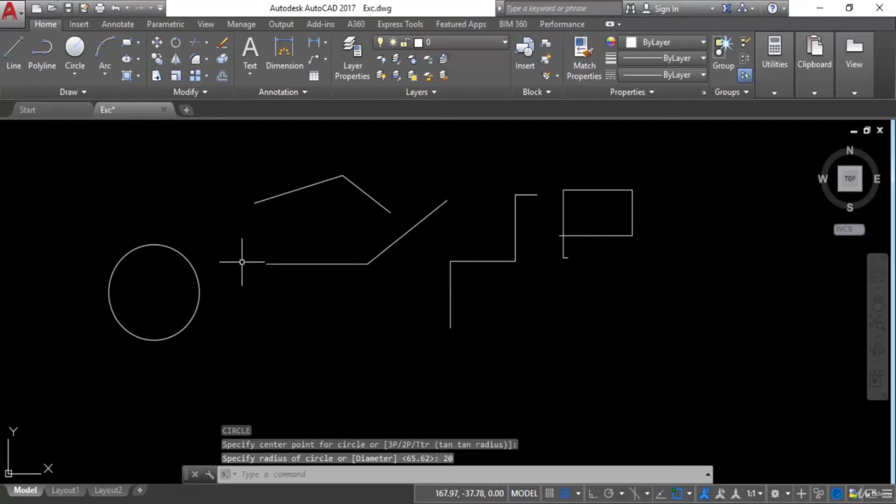Again, now I will draw a circle according to diameter. I will press C, then enter, then give the first point. Now I will give D here for diameter, then enter. Then it asks what is the diameter of the circle, so I want to give 40 units. I will enter 40 and press enter. Now this circle is 40 units of diameter.

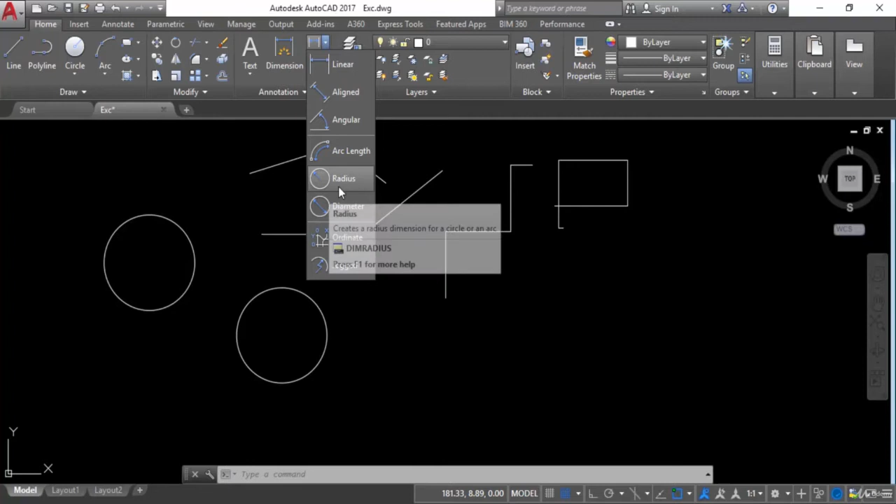And this is a 20 unit radius. So if you want to check radius and diameter, go into the Home tab and make sure you are in the annotation panel, and from here you can give the dimension. You can see some options: linear, aligned, angular, arc, radius, diameter. So if you want to check the radius, click here, or you can use the command DRA, for checking the radius of a circle.

So I will click here and click anywhere on the circle, and now it gives the radius of the circle. Or you can use the command D, R, A, then press enter. Now I will click here and you can see this is the radius.

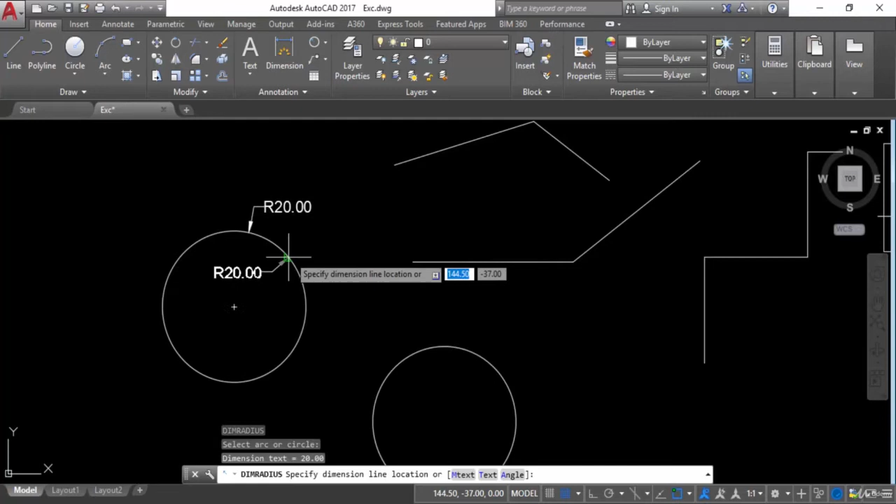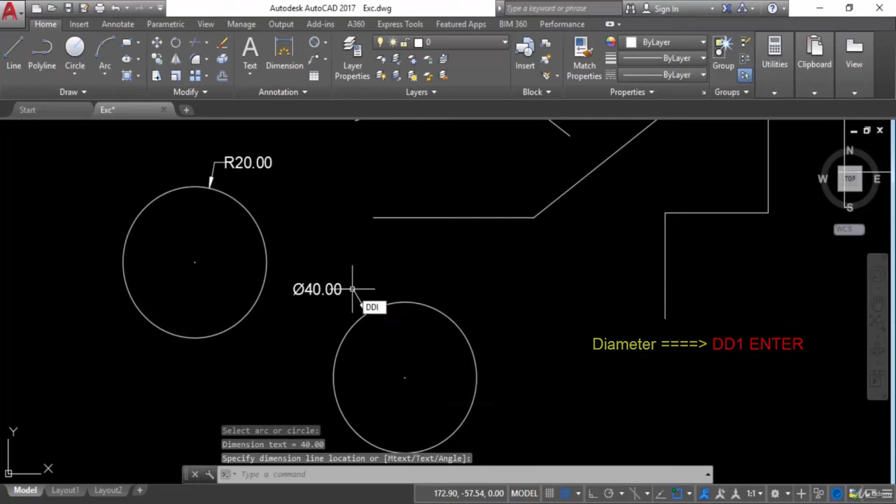Now if you want to check the diameter of the circle, go to the annotation tab, go into diameter, and click anywhere on the circle to check the diameter, or use the command DDI, meaning D and then I. I will press enter and check the diameter of this circle. As you can see, the diameter of the circle is 40 and the radius is 20. This means the diameter is double the radius, and the radius is half of the diameter. So I hope you understand how we can draw a circle according to diameter and radius.

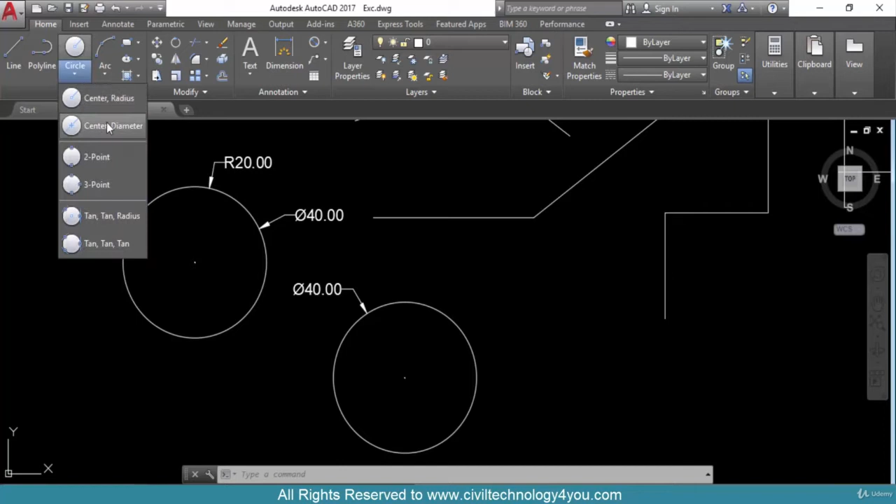Now we will use some more options. Click here and you can see some options like 2 point, 3 point, tangent radius, tangent tangent radius, and tangent tangent tangent. Radius is clear now, diameter is clear now, so we will use 2 point.

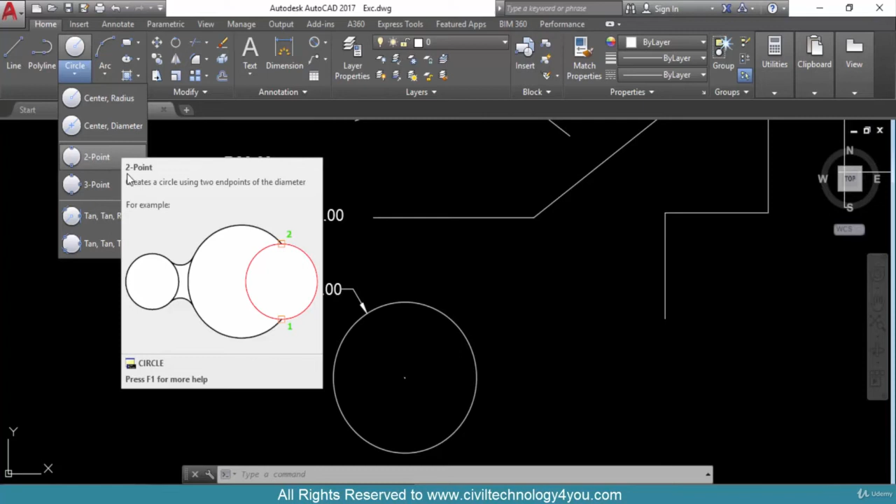For example, I want to draw according to 2 point. So I will draw a straight line here, and I want to draw according to this line. I will go here, press 2 point, then give the first point and then the second point.

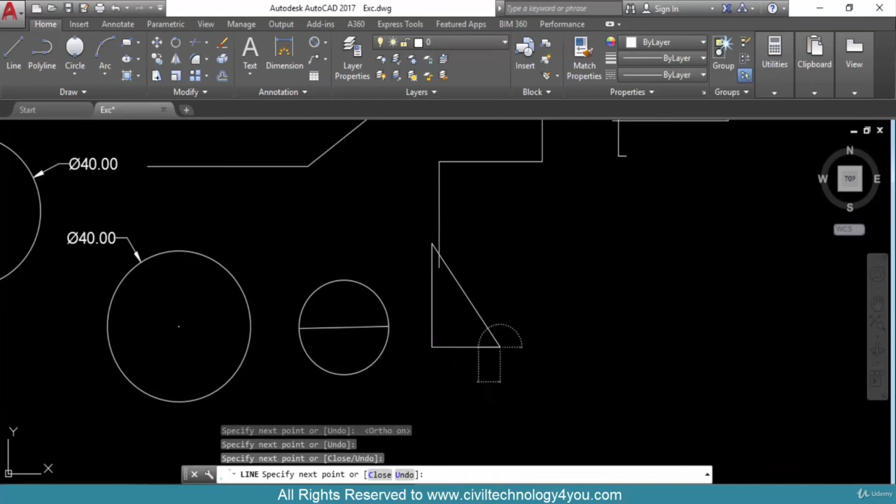Now we will see for 3 point. For example, I want to draw a triangle here. I'll turn on ortho mode, then this point and then this point. Now I want to draw a circle according to 3 points. I will go into the 3 point option, give the first point, second point, and then third point. Now it is according to 3 points.

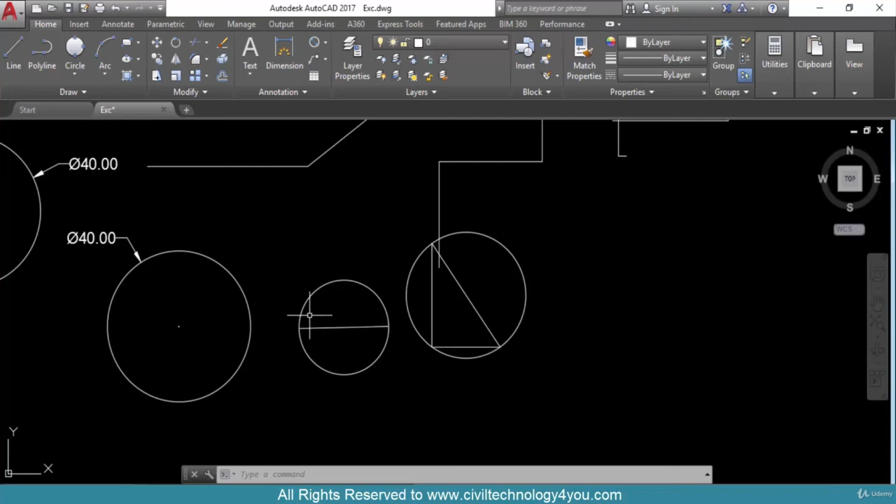Now there is one more option, tangent and radius. What is tangent? Tangent means a line or a plane that is just touching the object, not intersecting. For example, if I want to draw a circle that just touches this circle and this circle, that is called a tangent.

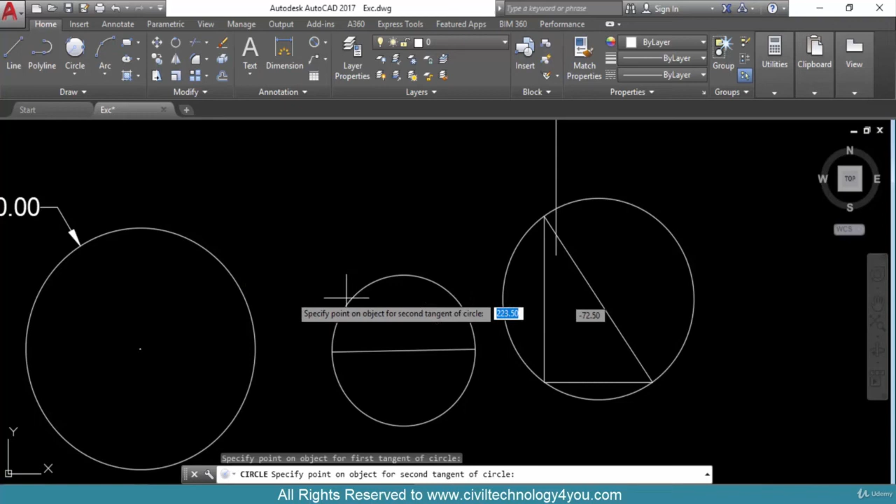So I will use this option as tangent and radius. I will go here and give the first tangent, then the second tangent, touching this circle and this circle, and then give the radius, for example 20 units. Now I will press here, and you can see the third circle is just touching this circle and this circle. That is what tangent is all about.

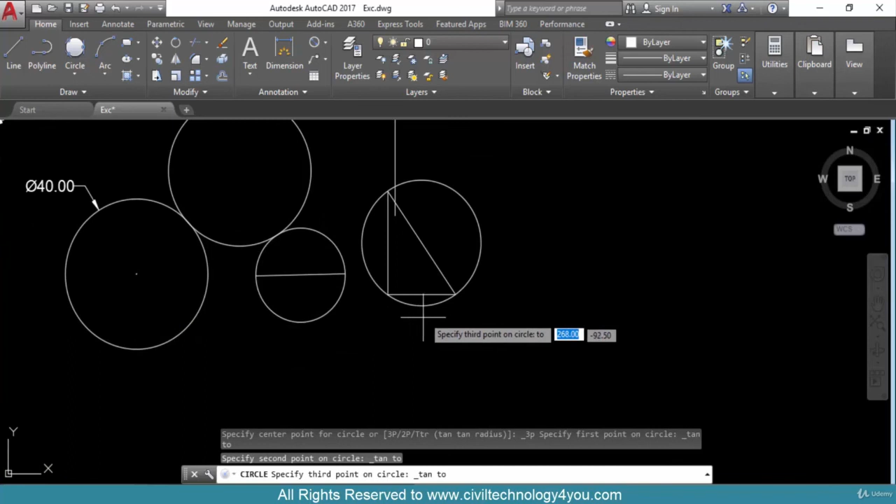Now one more option: tangent, tangent and tangent. This means it will touch three tangents. I will click here and give the first point, second point and third point. Now it is touching all three circles, that's what it means.

Now again, if I want to give tangent, I will go to tangent, give first, second and third. Now it is touching all three. So that's what tangent, tangent, tangent means, while tangent, tangent and radius means it will touch two objects and we also give the radius of the circle.

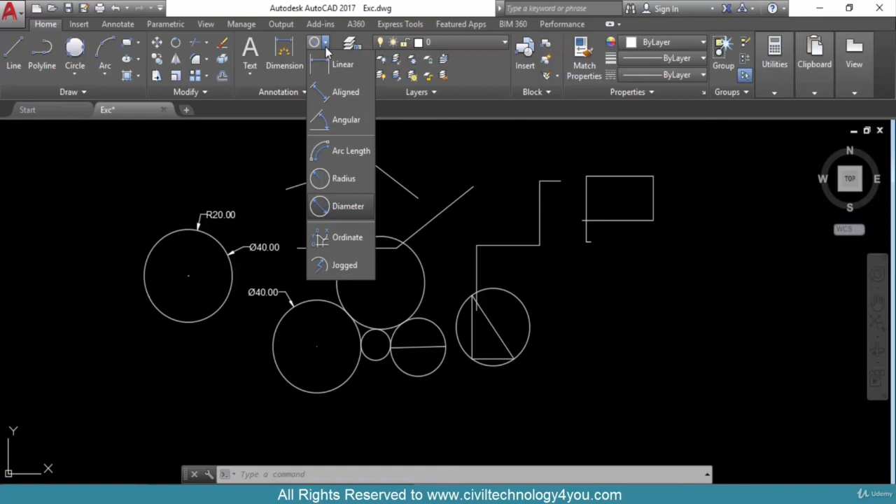So these were the options: center radius, center diameter, 2 point, 3 point, tangent tangent radius, tangent tangent tangent. I have also discussed how we can give the radius and diameter to the circle. I hope you understand how we can draw a circle according to these options. Thank you and Allah Hafiz.